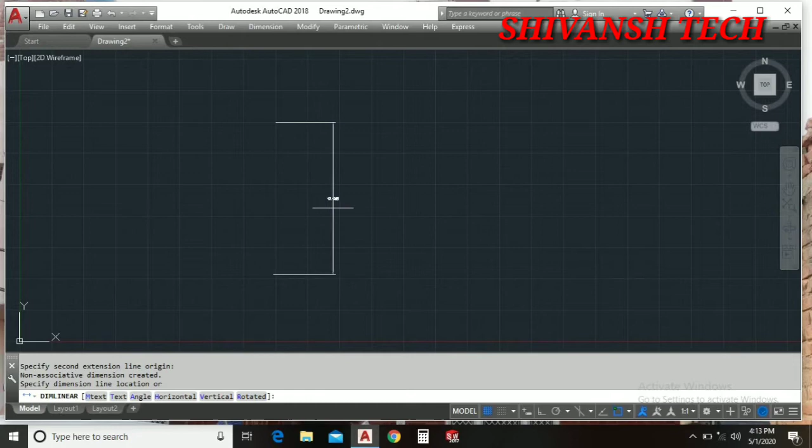Alright guys, let's draw a line here, something like this. We can see this is a dimension of 12.12, and this is not in inches. Alright guys, I hope you understand.

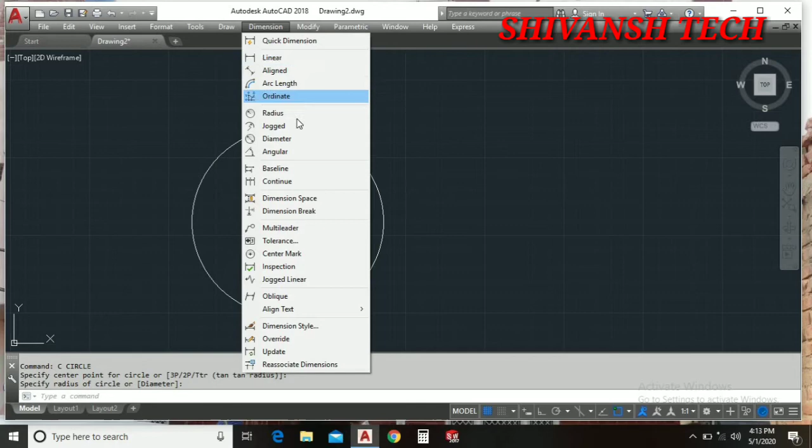Let's draw a circle here. I have drawn a circle. Given that I have already selected millimeters in the units, when we check here, this circle has a radius of 3 mm. Alright guys, I hope you understand.

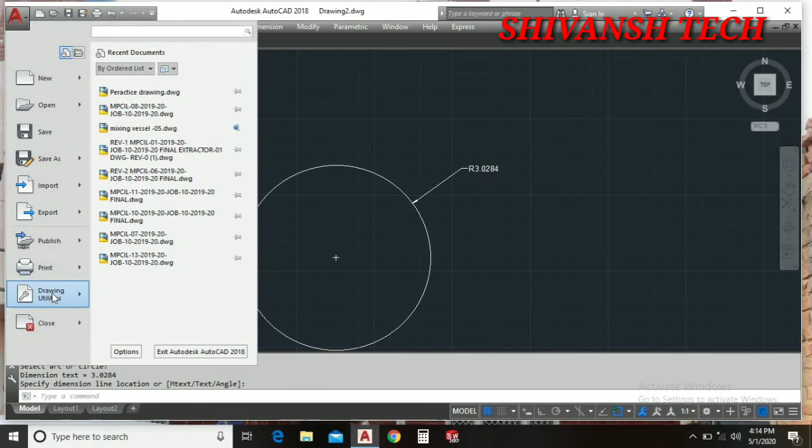Let's select one more way to work on units. We can go here to the AutoCAD icon. We need to click here, then come to Drawing Utilities. As I click here on Drawing Utilities, we need to go to Units.

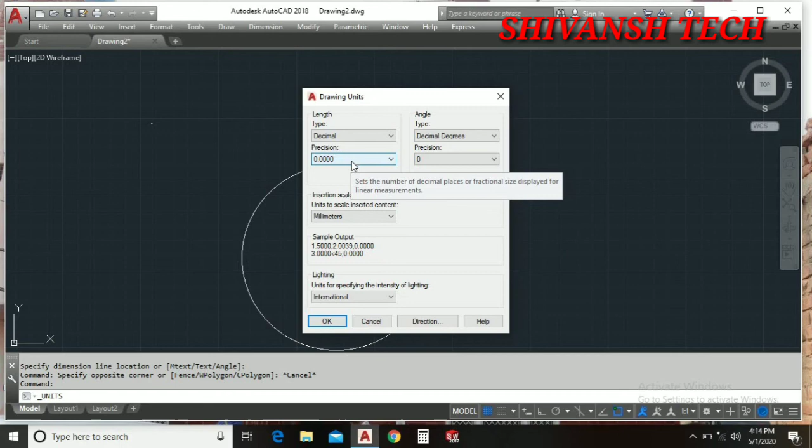Alright guys, as I come here, the same pop-up window opens again, and we had selected millimeters last time. If you want to change it you can, and if you want to work in millimeters you can continue with this. Here is one more option for precision. We can enter the precision value according to our requirement, as we can change it here.

Alright guys, we can press OK. Our AutoCAD dimension is set. I hope you understand how we can change or check in which units we are working.